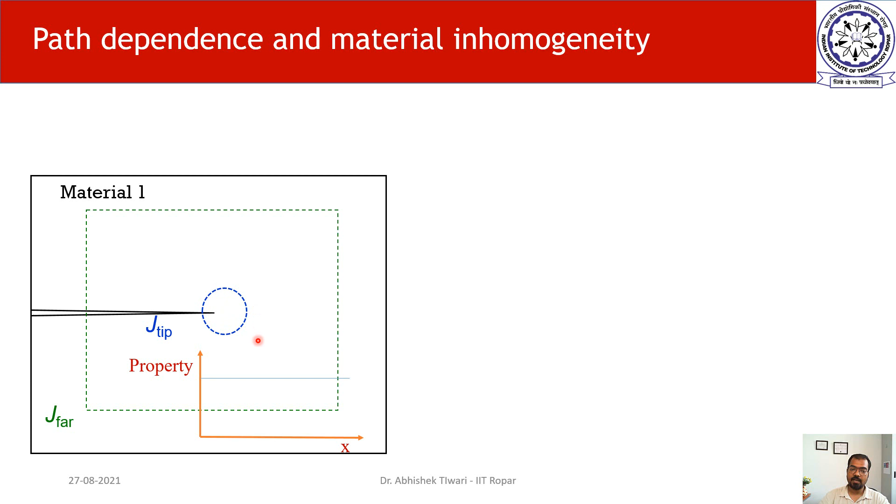So if we have a homogeneous material which is cracked - homogeneous meaning the material is same everywhere and the properties are same everywhere - and if I evaluate the value of J integral at a contour very close to the crack tip, and at a contour far away from the crack tip, I will get the same value because this J integral defines the singularity, and there is only one singularity. So inside the contour there is only one source or sink of energy, in this case the crack tip, and therefore as long as the contour encompasses only one singularity, I will always get the same value. That can be seen from the stress distribution of a homogeneous material, which looks like this.

Now imagine I have a sharp transition of material, which can represent a dissimilar metal weld along an interface. Here I have a transition from material 1 to material 2, and material 1 has higher values of mechanical properties - Young's modulus or yield strength is higher compared to material 2. This means that if the crack tip grows and crosses the interface, it will be a stiffer-to-compliant transition. In a rough way, I can call it a hard-to-soft transition.

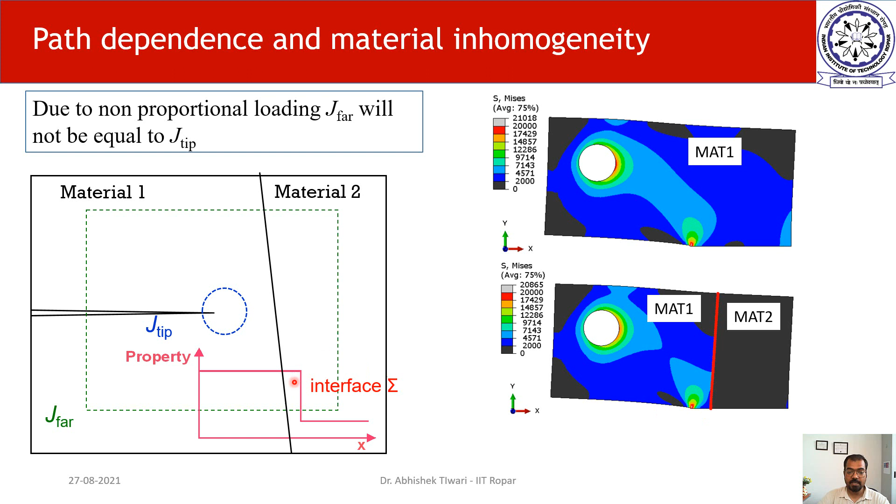In such a scenario, you look at this picture and see that the stress distribution is asymmetric. For the same amount of J far, I will have more energy available at the crack tip because here there is no energy - the stress is zero, so the strains are also smaller, so you can imagine the strain energy density to be very small here. So more energy will be available at this crack tip, and therefore the crack will have a higher tendency to grow. The reverse would happen if I change material 2 - if material 2 has higher Young's modulus, then the reverse will happen and less energy will be available.

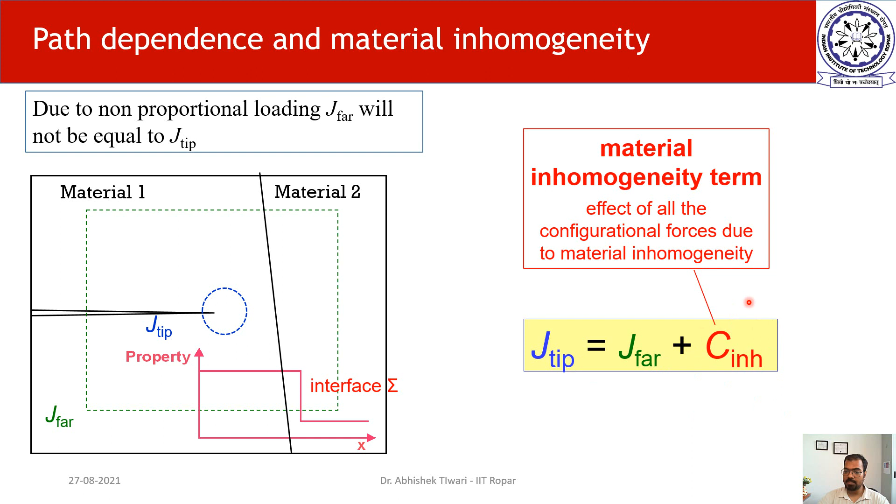So under such conditions, J tip is not equal to J far, but there is an additional term. Whether it is positive or negative depends on what kind of transition it is. If it is a hard-to-soft transition, the inhomogeneity term C is positive, meaning J tip will have a higher value. So the C inhomogeneity term will be positive, and the reverse would happen if it's a soft-to-hard transition.

So we can use this property, which we call the material inhomogeneity effect, to improve the fracture behavior of the material, to improve the crack resistance of the material, and we can induce material inhomogeneity. One way is by placing a sharp transition of material, or by creating a hole - there also I will have a sharp transition of material - or by embedding a very hard material inside, like an inclusion, like a reinforcement of a hard part.

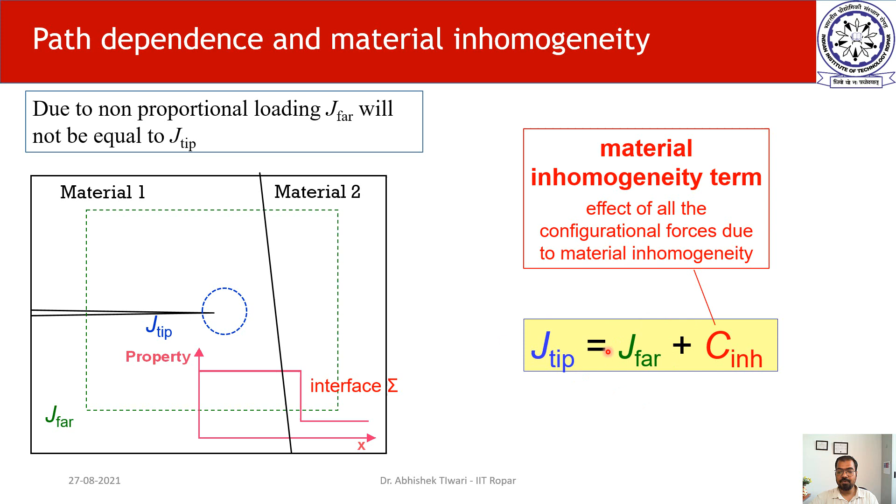So we calculate J tip and J far, and the difference between these two defines how much material inhomogeneity is there. We did some calculations long back for a polypropylene matrix with softer polymeric interlayers IL1 and IL2, where IL1 is much softer than IL2. For a change, we also calculated for a harder aluminum alloy, and you will see that when the transition is from hard to soft - that is, for the cases IL1 and IL2 - the tendency, the behavior is the same.

As the crack grows closer to the first interface, the crack driving force increases. Ideally, if this were a homogeneous material, J tip should equal J far, so you should always get a value of 1. But because there is an interlayer, because there is an inhomogeneity, the crack driving force increases as the crack comes into proximity with the material inhomogeneity. When it's hard to soft, the crack driving force increases until it reaches the first interface, then it drops, then it regains its value of 1 as soon as the crack tip has crossed both inhomogeneities - that is, interface 1 and interface 2.

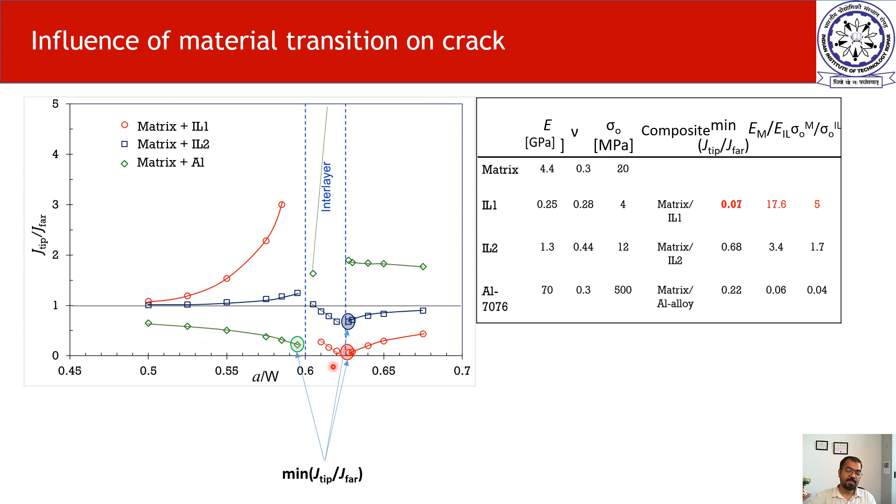The reverse happens when the interlayer is harder compared to the matrix.

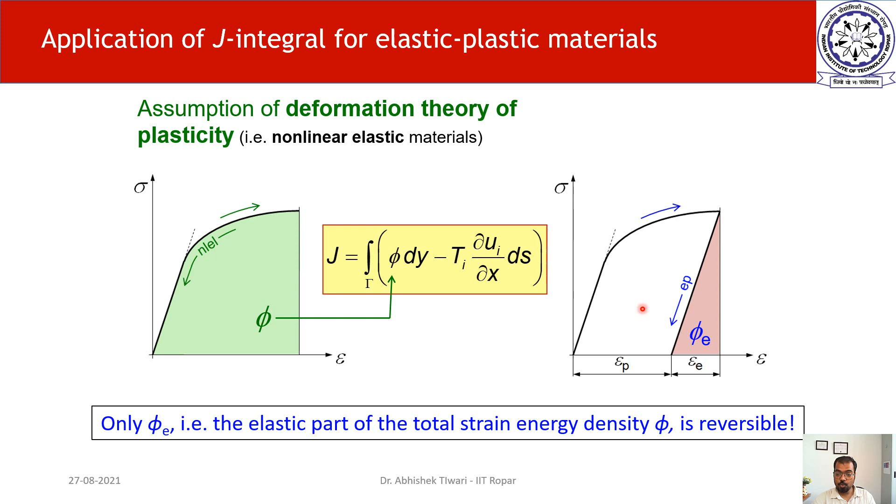The other problem with conventional J integral is that it assumes non-linear elasticity, which means the complete area under stress strain curve. Although for elastic plastic or elastic creep material, not all energy is available for the crack tip, and plastic energy is not available because that is dissipated, also the creep energy. So only elastic energy is available for the crack tip to grow, and that causes a value which is much away from the true crack driving force of the material for elastic plastic and elastic creep materials. Let us look at what happens when the material is creeping instead of plastically deforming.

So we have a close cousin of J integral, which is called C star integral, and there is another one which is CT integral, and the basic difference is that some of the terms in the J integral has been replaced with the rate of change of those values. For example, phi dot is the rate of change of strain energy density calculated using this formula, and U dot is the rate of change of displacement.

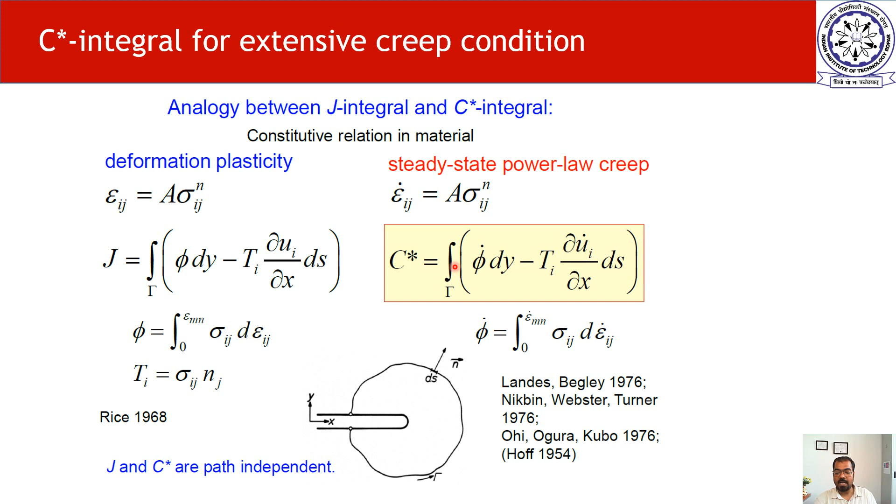But the point to note here is that C star is not equal to the rate of change of J integral. So J for a static crack for a non-linear elastic material does define crack driving force, but C star does not define crack, is not related to the crack driving force at all. dJ by dt, if you take the derivative of J integral with respect to time, you will have 4 terms, and therefore dJ by dt is not equal to C star. But dJ by dt will define the rate of change of crack driving force, at least for some ideal conditions. Or we cannot use it.

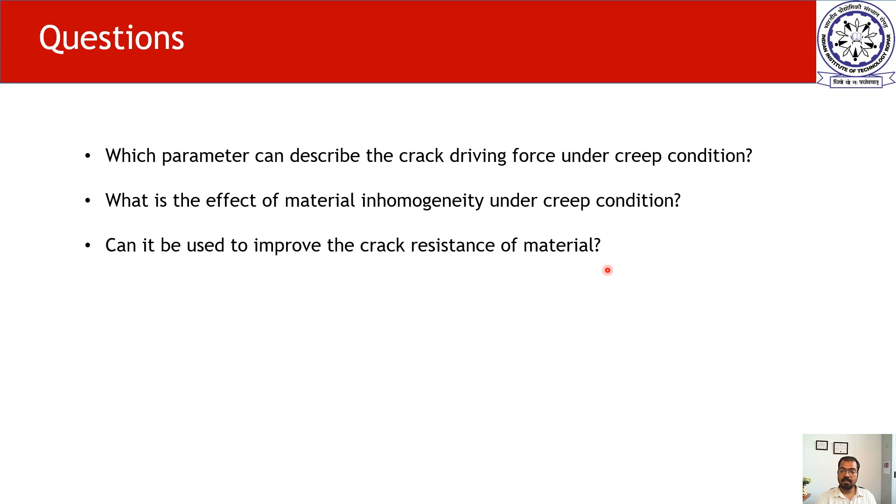So the question is, which parameter can be used to truly define the crack driving force under creep condition? Second question is, does material inhomogeneity effect give the same effect to a crack under creep condition also, and can we use that to improve the crack resistance of the material?

So we have used the concept of configurational forces. It is a very old concept and also very simple concept, that if you imagine an interstitial atom which is inside the material and at the surface, there is a change in energy state. At the surface, the surrounding atoms, at least half of them are not there, unlike when the interstitial atom is inside and from all the sides the bigger atoms are pushing it. So at this point, this atom is happier.

So there is a tendency, there is a force, because there is an energy gradient, there is a force which is compelling this interstitial atom to go to the surface. Whether or not this atom will go to the surface is a different game, because there might not be a path for the atom to go. There might be a lot of obstacles. Nonetheless, there is a force, and that force is configurational force.

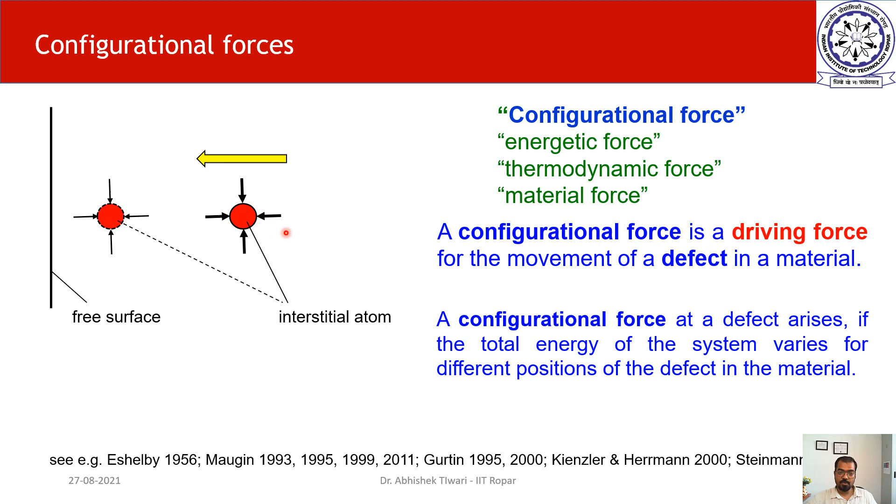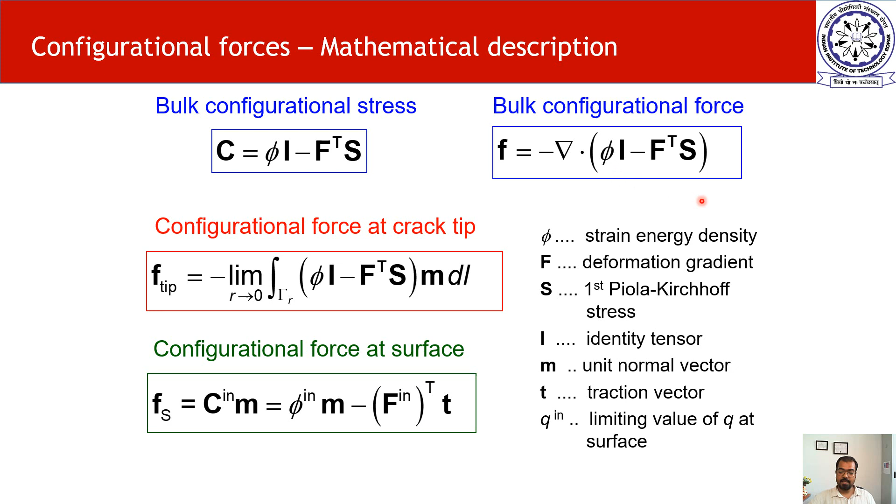We calculate configurational force using these formula in finite element analysis by post-processing the material, the parameter value at the integration points, and the main concept is here. So C is the configurational stress. It is also the Eshelby energy momentum tensor, and the divergence of that gives me the configurational force term. So divergence basically means the inwardness or outwardness of whatever parameter's divergence is being calculated. So that would mean when this value is 0, it would mean that there is no inwardness or outwardness of the energy which is coming in and going out. And if this is a non-zero value, then there is a net configurational force there at that material point. So that's how we calculate it.

Now look at a cracked specimen, and let us say that there is a creep zone. Initially, if the material is elastic plastic and the stress applied on the system is higher than the yield strength, there will be a plastic zone. But with time, if you keep the force constant, the creep zone will increase and it will encompass the plastic zone. Now if you have contours like gamma 1, gamma 2, gamma far, which are encompassing that deformed zone, then the value of J integral for all these contours will be same. The rate of change of J integral will also be same, and they will be defining the crack driving force, because the crack will be moving with the deformed zone as long as the deformed zone is inside the contour. And therefore we can use nonlinear elastic theory for small scale creep condition.

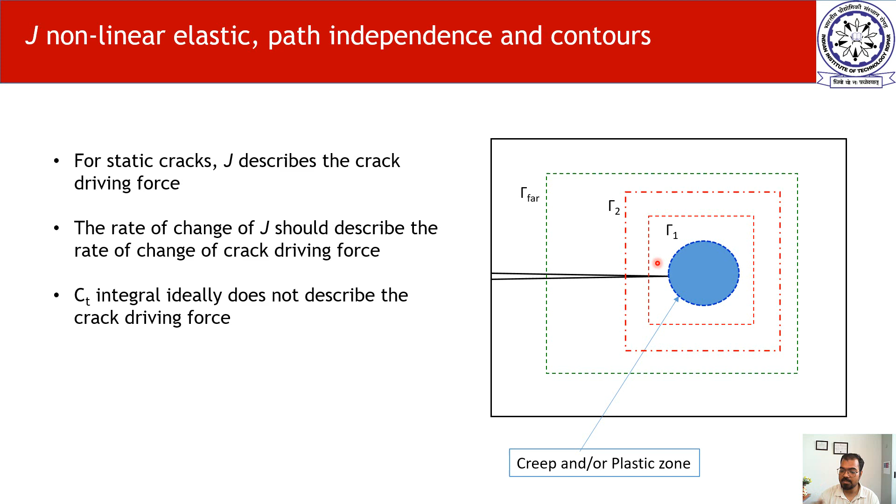So we did that for a material, for a specimen where a material transition happens from material 1 to material 2, and material 1 is representing Waspaloy, nickel superalloy with the creep properties and elastic modulus, and material 2 is a hypothetical material with elastic modulus of steel, but the Norton's law coefficient we have kept constant in these two, and we have just taken the creep exponent to a smaller value.

That means the creep strain will be more in material 1 in comparison to material 2.

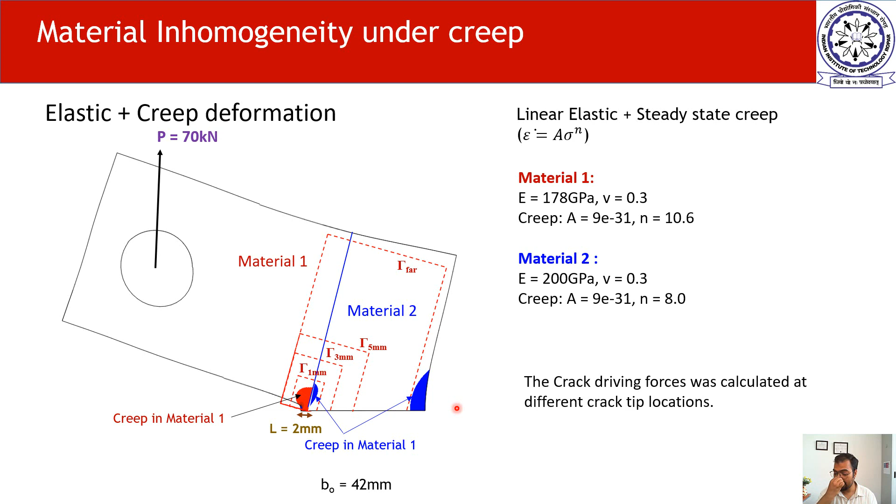So that is why that is happening, but dJ/dt is showing more path independence than the C(t) integral. The effect on the crack driving force is calculated for a constant value of J far field at 17 hours. After deforming the material to 17 hours, we calculated the J tip and J far field, and the ratio shows that the crack driving force increases as the crack grows closer to the interface.

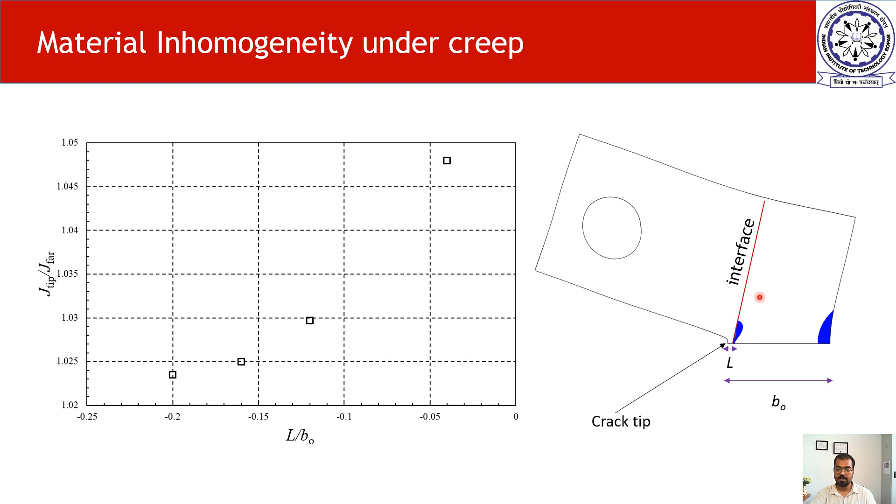So this was for elastic creep condition. We did it for a hypothetical situation where material 1 is deforming only plastically—elastic plastic, no creep—and material 2, which is on the right hand side of the interface, is deforming in elastic creep condition with no plasticity. For this scenario, we again calculated the J integral.

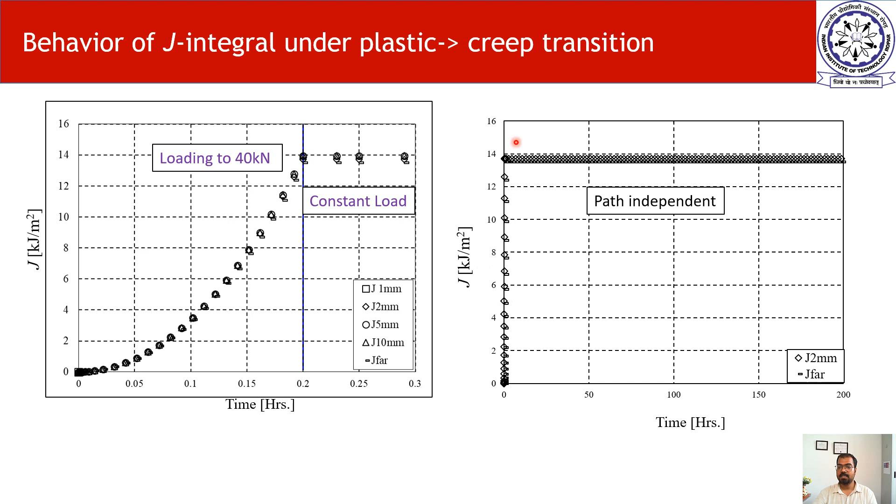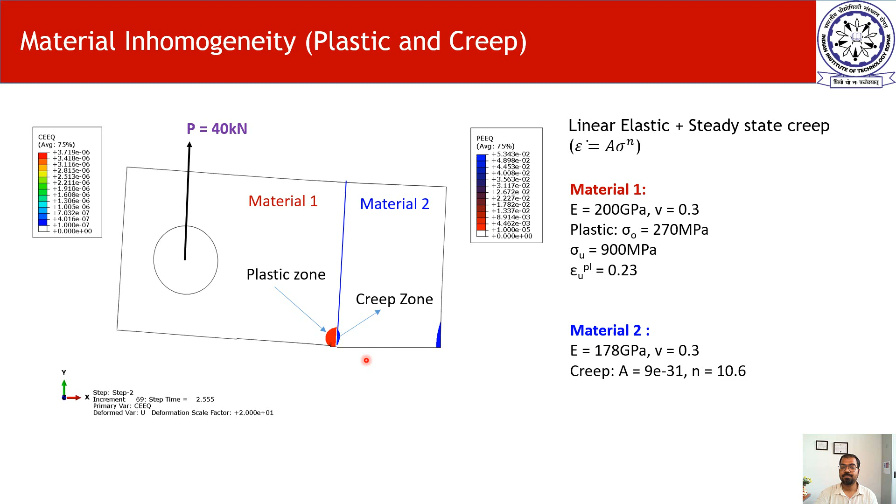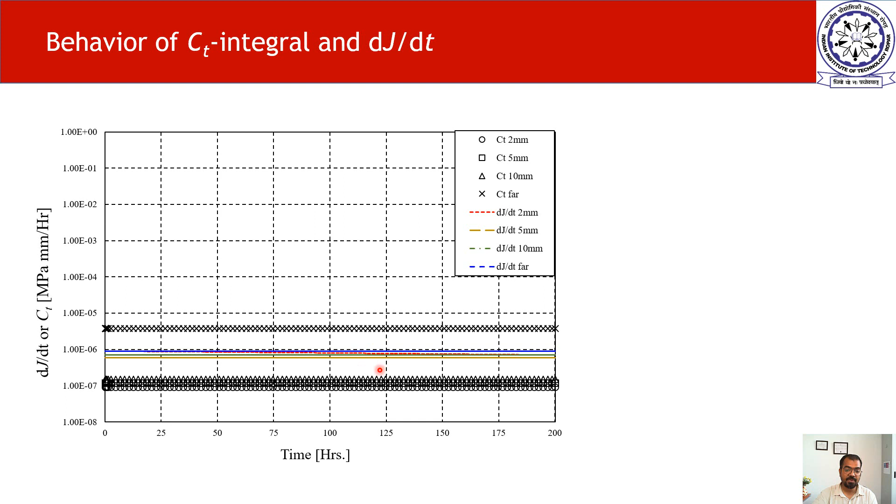One can calculate, using their own code, by taking the plastic strain also into account. But the dJ/dt is taking everything into account—it is also taking this plasticity, and it is also taking the creep deformation on both sides of the interface at the crack tip. That shows a better representation of the crack driving force, and it also shows better path independence even for the far field integral, for the 2mm, 5mm, and 10mm far field integral.

The effect shows that first the crack driving force increases, but it appears that even when the crack has not come very close to the interface, the behavior has reversed here. This is very different from what we found for the elastic plastic case, but this needs to be confirmed more by taking more points at different crack tip locations closer to the interface.

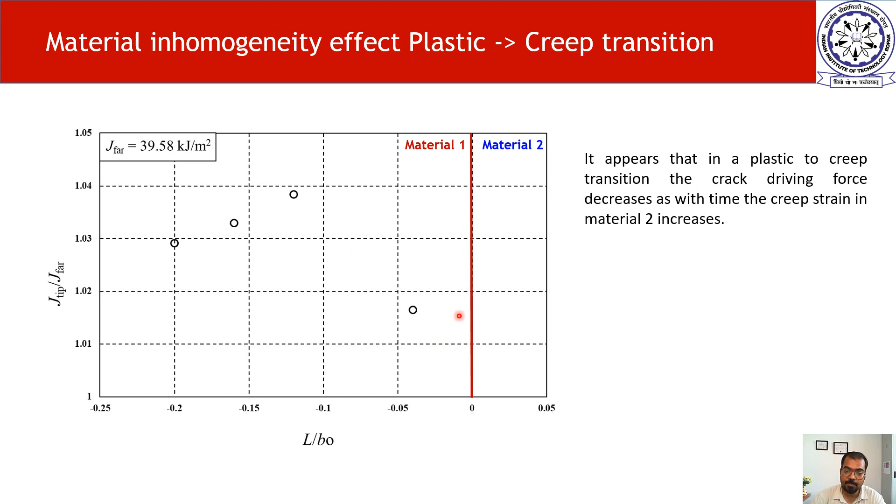At the end, I would like to summarize that for elastic creep and elastic plastic creep conditions, and also in other work, we have found that dJ/dt shows path independence even in the small scale creep condition, and it is related to the true crack driving force unlike the C(t) integral, and it becomes equal to the C(t) integral for extensive creep condition. So in extensive creep condition, this is equal to the C(t) integral, and the crack driving force appears to decrease when the crack transitions from plastic to creep material, but this is a different result than what we expected.